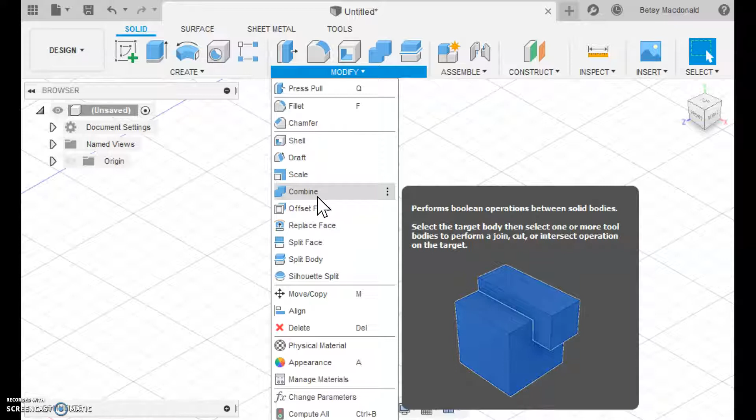Hello there. This Fusion 360 beginner's video is going to look at a tool called Combine. I have other videos that already looked at using this tool to join two primitives or to cut one primitive from another. This video will focus on the third operation that the Combine tool can do, called Intersect.

I'll come back here. I'm going to close this for now, and I'll return when I have two primitives to go with. So I want to reset my area with the home button, and I'm going to make two spheres.

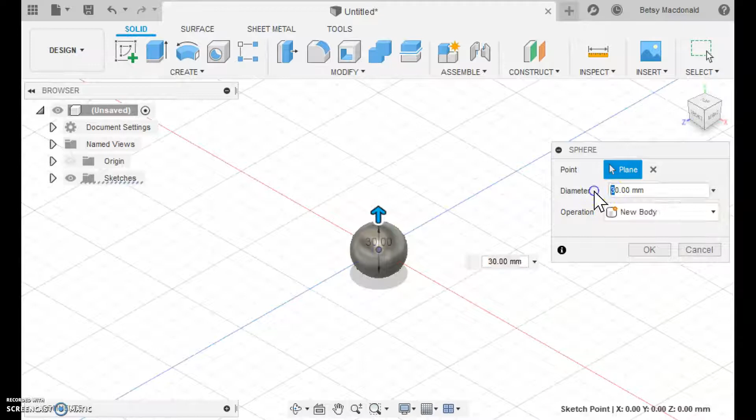I think I'm going to make them 15 millimeters. So there's one. I'm going to shift it over here, and then I will make another one. Okay, so those look pretty good.

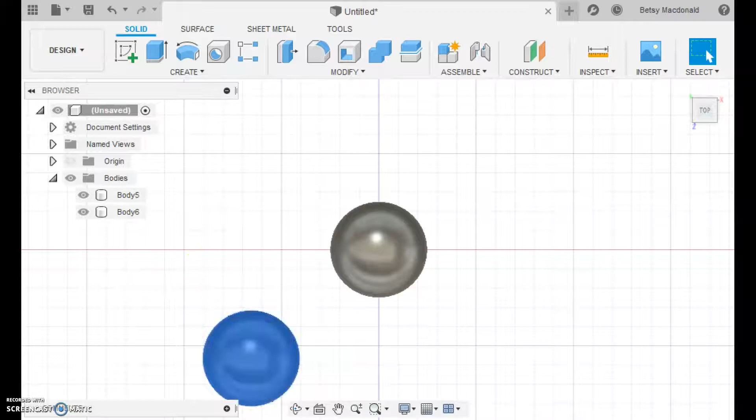Now I'm going to switch to the top view because I want to try to get them aligned. So I'm going to go move copy, zoom in a little bit, and move this one so it looks slightly intersecting with the other one. I'm going to hit OK. So you can see these are two intersecting spheres.

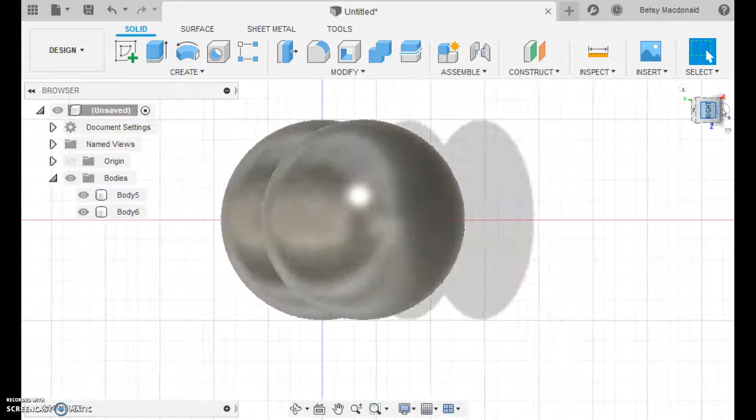What I didn't look at is if they are arranged this way, and they're not. So I'm going to right click here, move copy. I'm going to use this one to get it lined up so it's a little bit better on that side. And I should flip around this way.

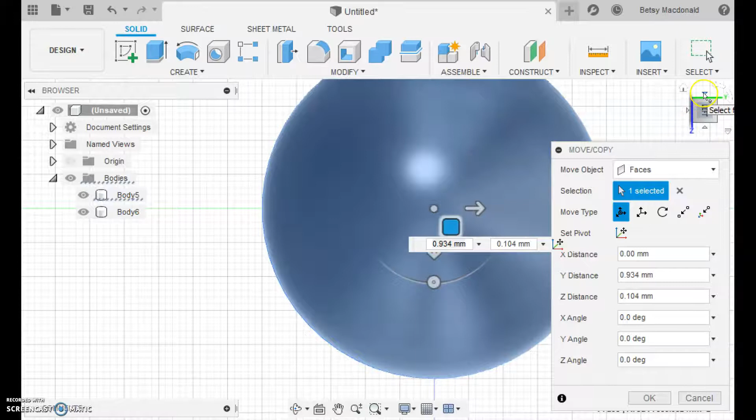They look pretty well aligned that way. I can flip to the top, zoom out, and pan over. It looks like they're lined up how I want them to be. I'm going to twirl back this way and hit enter. So there I have two spheres.

If we go to Combine and ask it to keep the intersection, we're going to get the part where both spheres overlap. So let's see what happens. I mentioned this in the other videos - I prefer to have nothing selected when I go to combine because that way I can choose from scratch. Right now I don't have a target body or a tool body.

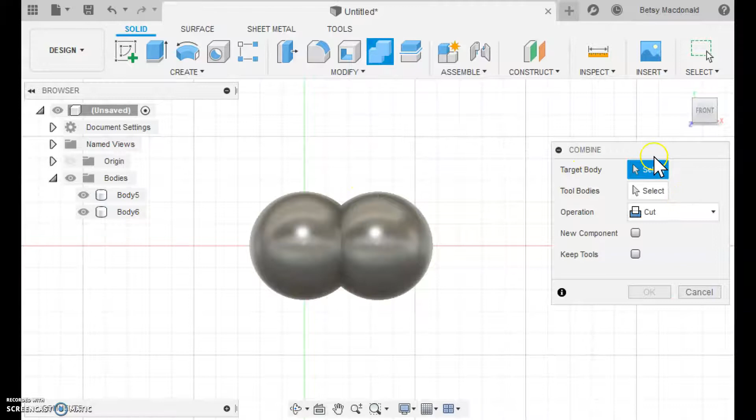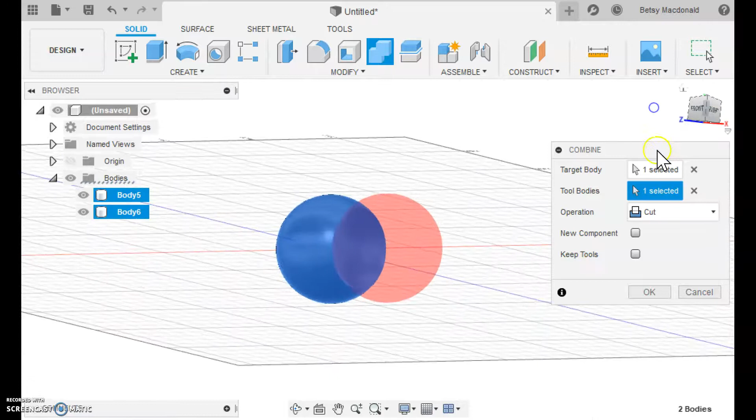I'm going to click the left one for my target body, and then for my tool body it's waiting for me to select, so I'll click this other one. Right now the operation's set for cut. If I were to click OK, I would get a little concave dip in there, but I don't want to cut. I want to intersect. The nice thing about this tool is it shows us what we'll end up with. When I click OK, I have this sort of little flying saucer thingy.

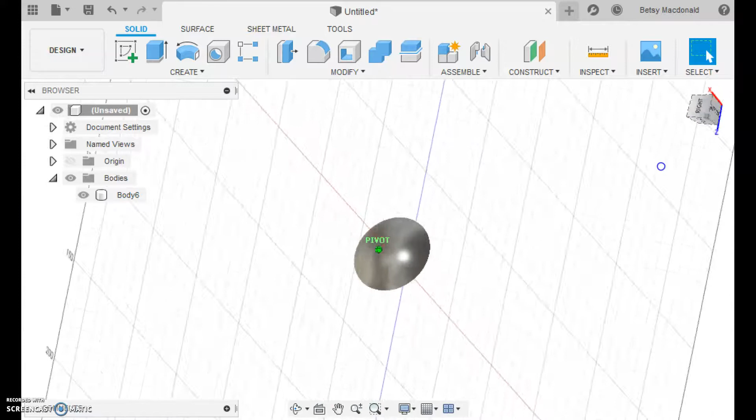Which is pretty cool - it's like a pretty fat lens. There's a decent thickness from one side of the lens to the other, if we were going to look at this as a lens. If you wanted to make something smaller, I'll shift this out of the way, but I'll keep it - let me just throw it off screen for now.

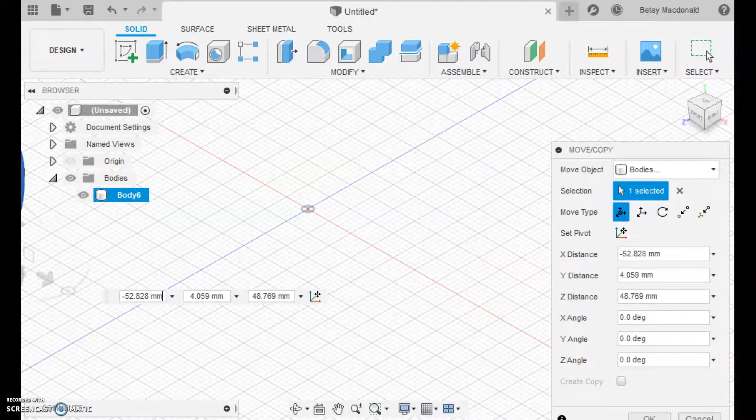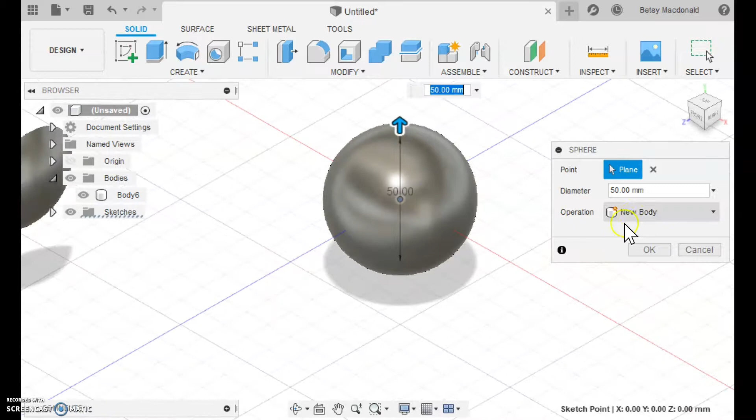Whoops, I forgot to click OK, so we'll do that again and hit OK. Oh shoot, I think I moved my home, but that's okay. So I'm going to try that again, and this time when I arrange my spheres together, I will have less of an intersection because I want to show you what effect that has.

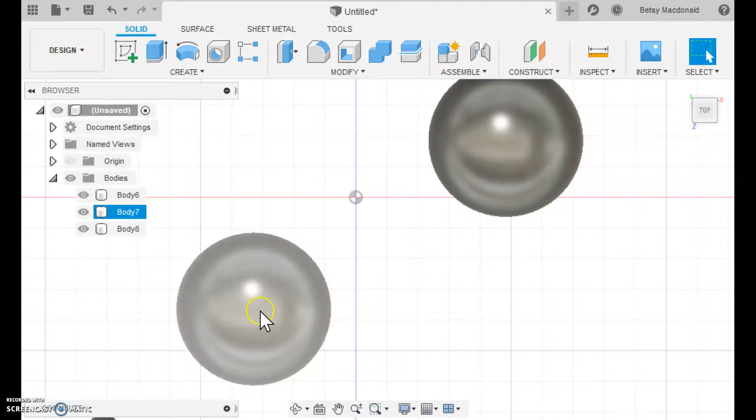So I will move it this way. I'm going to hit enter, create another sphere, and just hit enter. Then I'll go to the top view again and align these just by eye. But look, if I only intersect them by that much, let me just check it from the side. Yeah, I need to shift that over.

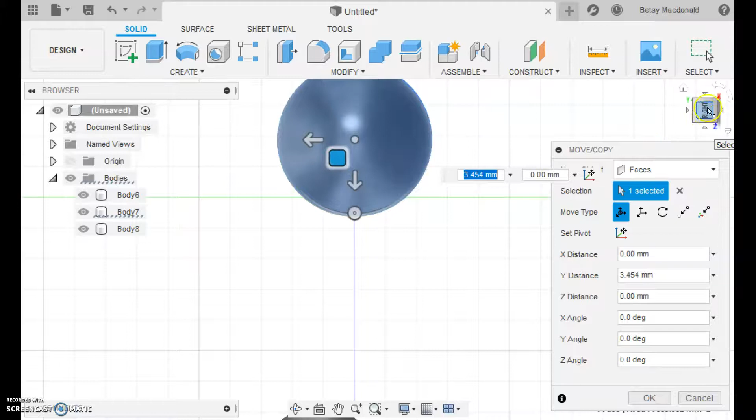I know it's not perfect, but you'll still get to see what the intersection does. If I look at my other angles, they are aligned well enough. So I'm going to tilt it there and go back to the front. You can see there, I only have a little bit of an intersection here, and I'm going to click OK.

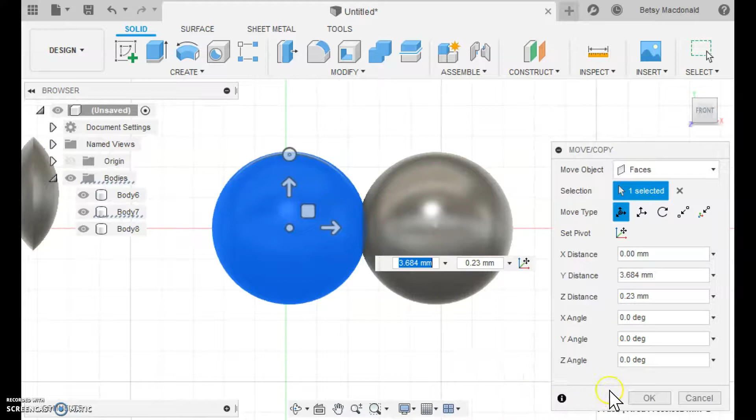The spheres are now intersecting just a little bit. So we're going to do the same thing - go to Combine, select a target body, select the tool body. It's already set on intersect, and when I click OK, I get a much smaller lens in all directions.

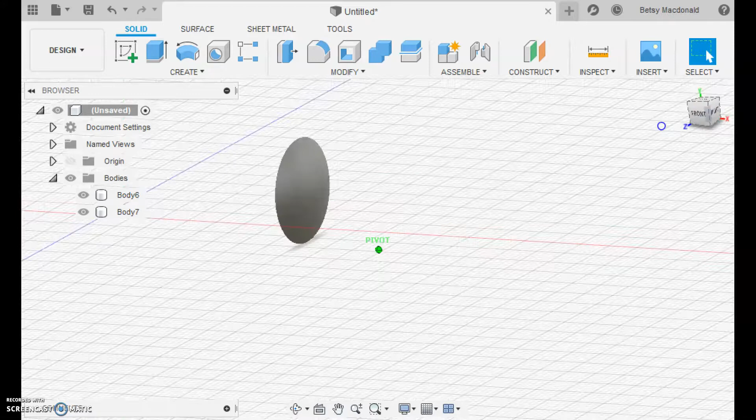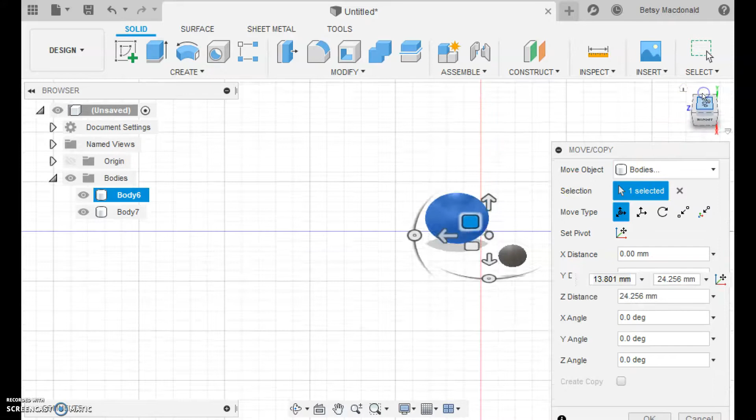So even though I used the same size spheres to start with, because the intersection of them were different, you can see it results in quite a bit different size lens, which makes sense. This isn't the only application of why you would use Intersect, it's just one of the cooler looking features by using Intersect.

So that's what you do. I hope you find Intersect useful, and I'll see you again in another tutorial.